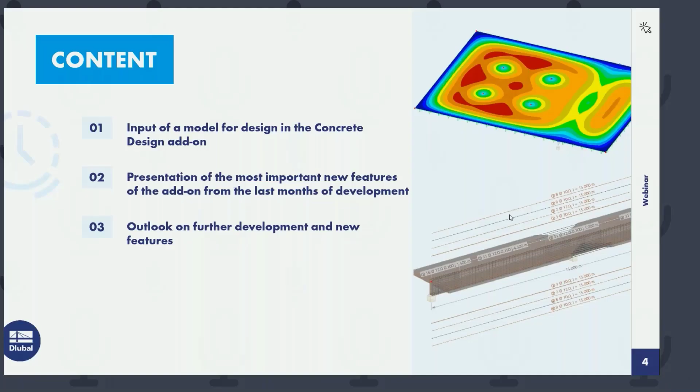Okay, thanks Andreas for the introduction. I will start with a short overview of the content of today's presentation. As I already mentioned, I will show you new features in our concrete design add-on. Therefore, I will create a small structure in RFEM 6, and during the modeling process, I will tell you about all the new features we now have in our concrete design add-on.

Just a short overview of these new features: mainly it's the automatic function for surface reinforcement. Then we have a new function regarding determination of required reinforcement for members, which now also includes the serviceability limit state design. Then I will show you how to design with member representatives. We also have a new multi-edit option in the edit member dialog for members and member sets. If we have entered reinforcement with a certain reinforcement layout inside our member, we now have a new function for printing graphics of this reinforcement template or proposal into the printout report. I will show this to you as well. And I will show you how to activate the design check for the shear joint in the add-on.

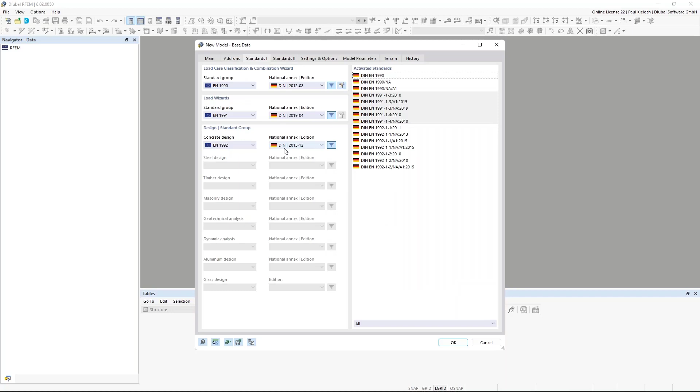Okay, with that, I would switch directly to RFEM 6. As I mentioned before, I will start with creating a new model. I'm opening a new model file, and what I would like to do today is start with a template. That has the benefit that some settings are already stored in the template, and add-ons can be activated, or I could predefine national annexes and so on. This is already set in this template, and I'll give it the name webinar, and maybe English, so that's the English one. And I start this file here.

As mentioned, due to the fact that I've used these templates, I have here a certain amount of materials, sections, thicknesses, and so on. I will use them today for this presentation.

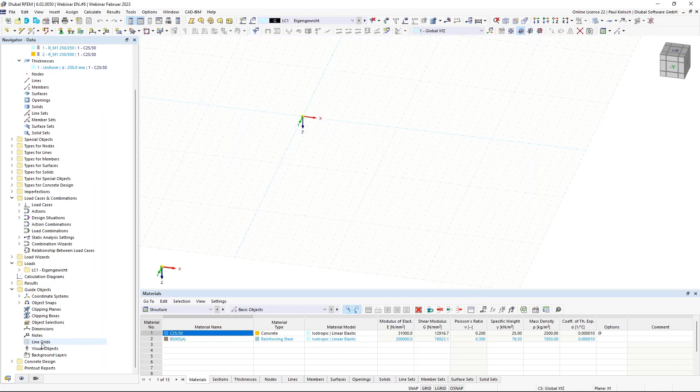So at first, I'm switching here to these guide objects, and there I will create a new line grid. I will use or show you today also the labels here and the dimensions.

Switch here over and enter the dimensions in X direction: 5 meters and 4 spans. So it looks like this.

And in Y direction, the first span with 5 meters. Then I have 2.5 meters and 2 spans. And the last one is again 5 meters. So this is my line grid, which I would like to use today.

It looks like this. And on this line grid, I will create my slab and my beams and columns and so on. So I can switch off the grid in the background, and then it's a little bit cleaner if you just see the line grids.

The first topic is entering a surface for design. So I'm creating here a concrete surface with the thickness of 250 millimeter and this concrete here.

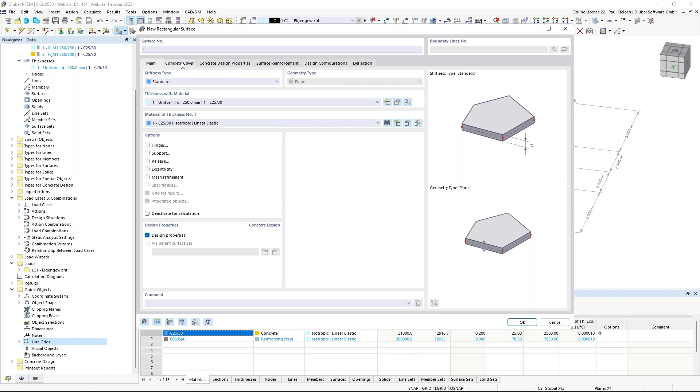And before entering this surface, I can directly set the design properties for this slab. So concrete cover and the concrete durability class, I leave it as it is by default here in this example, XC1.

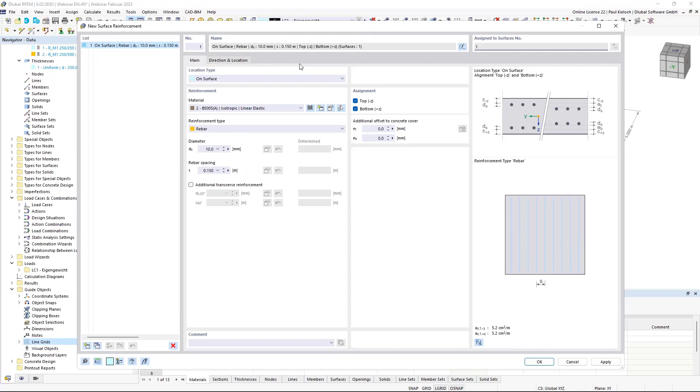The reinforcement direction is also default, and I will assign here a basic reinforcement for the whole slab with a diameter of 10 millimeter and a spacing of 15 centimeters in both directions.

You see here already some changes in this dialog, and I will come back to these changes and modifications in this latest version of RFEM 6 later after the first calculation. Okay, I can confirm this.

The design configurations, I leave them also by default for this first attempt here, and I will also come back later to these design configurations.

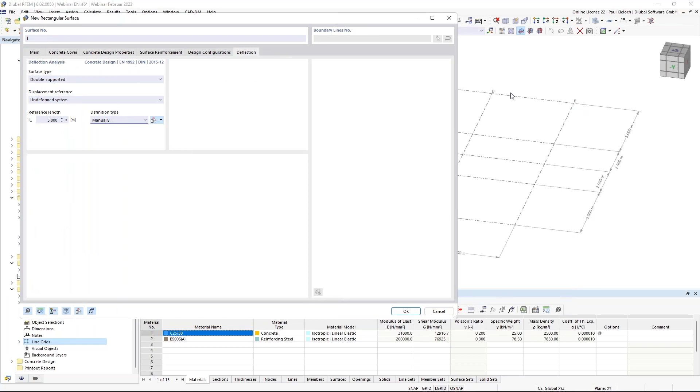Last thing I'm changing here is the reference length for the deflection analysis. So I switch this to manually, and the reference length is now set to 5 meters in X and Y direction.

Confirm this OK, and then I create here my slab. By default, you see here also the rendering of the assigned reinforcement mesh.

What's new now in RFEM in the latest version is here the description of the assigned reinforcement. In the previous versions, there was a small arrow downwards and upwards. If the arrow was downwards, it was the reinforcement on the bottom side, and if it was upwards, then it was the reinforcement on the top side of the slab.

That was changed a little bit, and it's now just a small line next to the text on the downside or on the upper side. So it's a small change here.

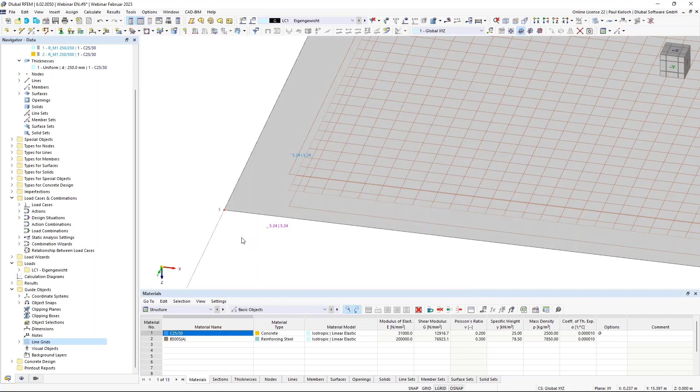What I would like to change is here the number of decimal places for this example. Now I'm switching off this reinforcement just to have a cleaner look on the structure.

The next topic is that I would like to enter a beam here, or a rib member, in this axis D. Therefore, I create a new member, switch the type here to rib, and I'm assigning this eccentric cross-section on the positive Z side of the surface.

That's a setting by default. The used section should be this 250 by 500 millimeter section. Can confirm that is okay.

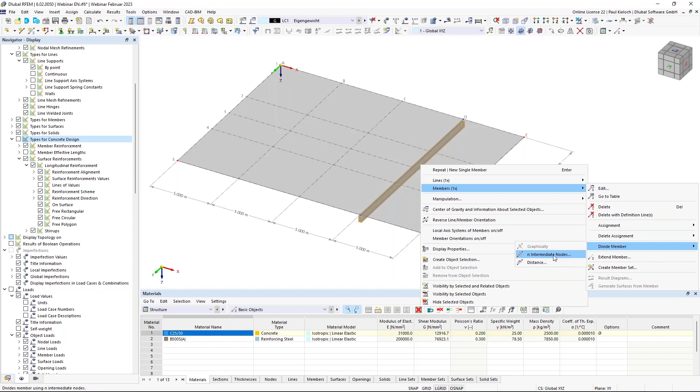And then I will assign this rib here in this axis. And here in axis 3, in this point in the middle of the beam, I would like to support this beam with a column, and therefore I'm dividing this member here by one internal node.

But what's new in RFEM 6 is that we can use this node type 'on member', which has the benefit that our member is not divided in two parts, making it a little bit easier for definition of reinforcement and so on. So I will create a new node just with the type on member, without dividing the member.

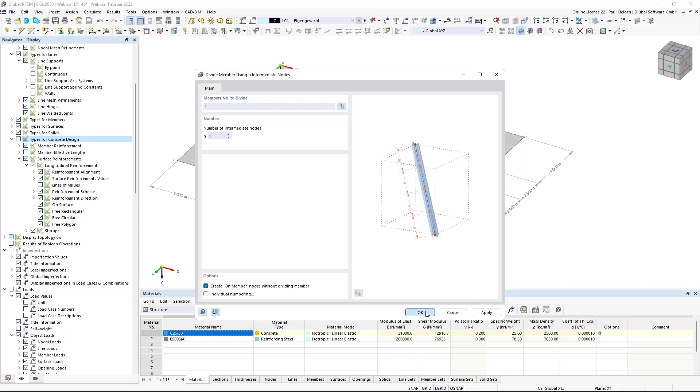You see this here in the middle of the beam with a light blue node, and that's the new type for dividing members.

The next steps I would like to do is entering here nodes for the column heads. So they are here in these points.

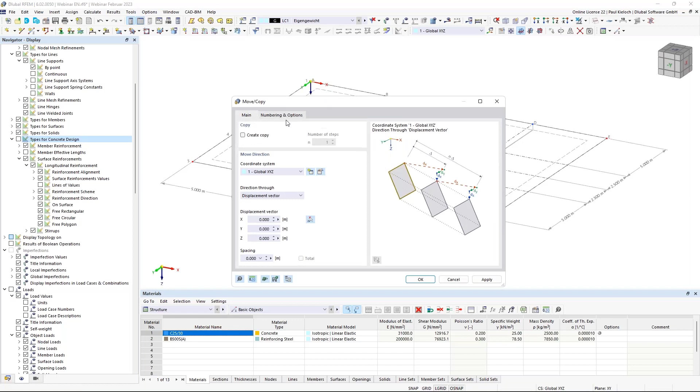Okay, and now I'm switching to the wireframe display model, and I can select these 5 nodes here, and then I will copy them with 3 meters in Z direction, and I can link these steps here and enter automatically a new member. Therefore, I will create a template.

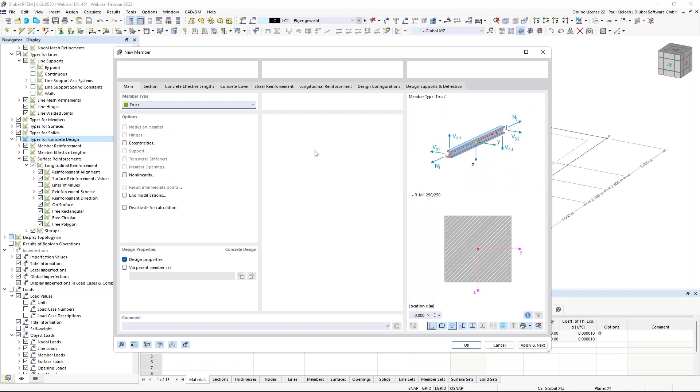The columns should be hinged at the top end and the bottom end. So I'm switching here the member type to truss. The section is pre-selected in this case, like I would like also to use it, with 250 by 250 millimeters.

And I can now go through all the settings, all these design properties here, and entering, for example, the buckling lengths for the stability analysis. And in my example, it's a braced system, and I would like to use these effective length factors of 1 in both directions.

Okay, next step would be the concrete covering. I leave it here in this example like it is. Regarding the shear force, I would like to use shear links with a thickness or diameter of 10 millimeter and a spacing of 15 centimeters. And the longitudinal reinforcement should be uniform surrounding, 4 rebars and a diameter of 20 millimeters.

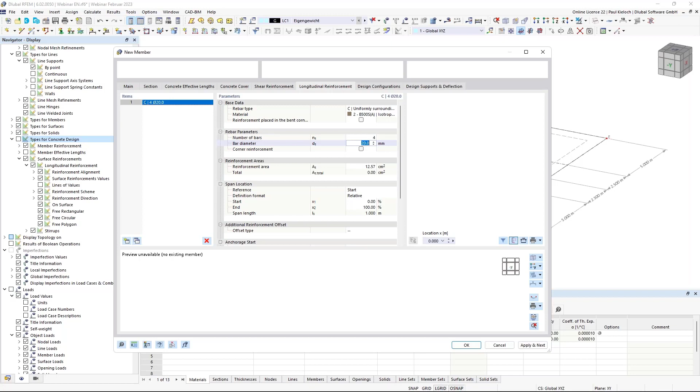Design configuration and design supports are not required to change here in this case, so I can confirm this. And then I'm using the template to create my columns, and they would look like this.

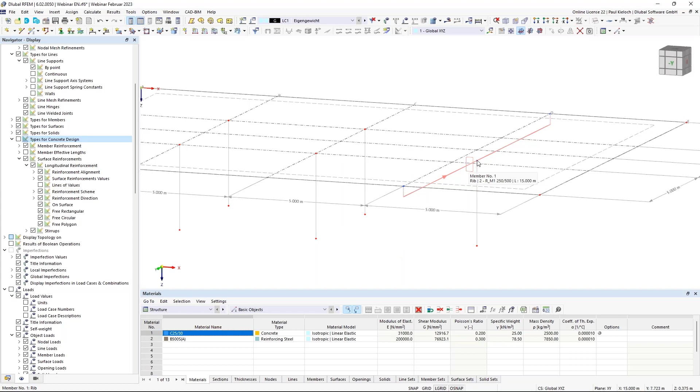I have just to take care because this node is here in the center of this eccentric beam, so the nodes at the bottom end are not in the same height. I will just do a double click here on this node and switch this to 3 meters, and then we have the same level here.

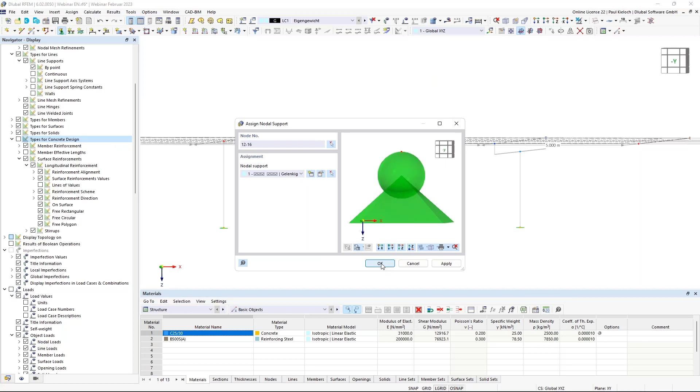Okay, then I can create the supports for these columns due to the fact that I have hinged member ends by this member type. I can create a new nodal support, and this is fixed or rigid in all directions. That would look like this in this example.

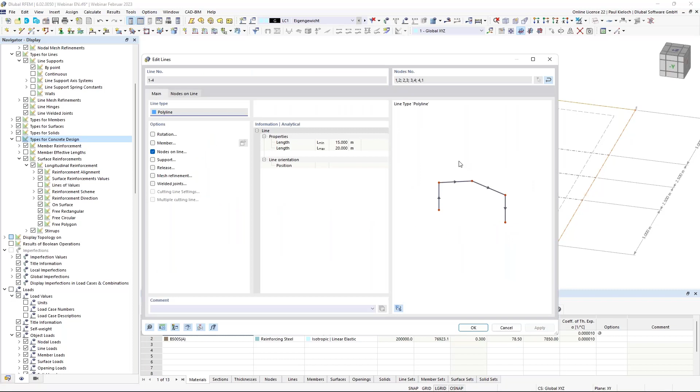Okay, then the next topic would be entering the support at the edge of the slab. So there I would like to consider walls. Therefore, we have also an option in RFEM 6, so I can select all the lines at the edge of the slab, opening them with a double click, and I will assign there a support, create a new one for them, and this one will be changed to local.

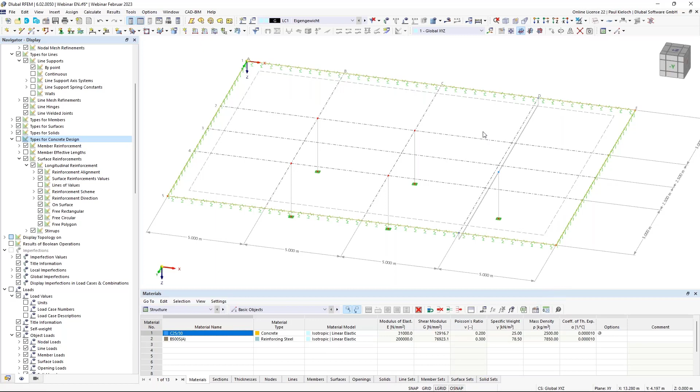And as soon as I switch this to local, I'm getting here a new option, stiffness via fictive wall. And the wall thickness should be 25 centimeters and a height of 3 meters. And it is hinged at the wall head and base. So that's okay for me. Can confirm this, and then I have also the lines on the edge of the slab supported.

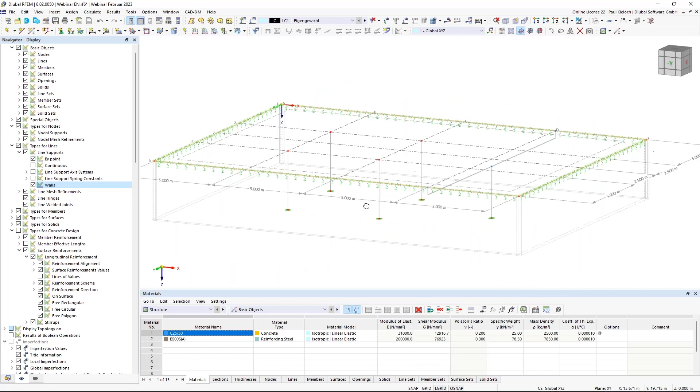If I would like to check this graphically in my system, then I can switch to the view or display navigator. And there under the line supports, I have the option to activate the walls, and then I would see the system also with these fictive walls here. That is basically my system now.

What I have not defined yet is the settings regarding the RIB. Therefore, I'm opening the RIB member once again, and I switch to this tab here with the RIB. And in this table, you can basically assign the segment length for the determination of the effective width for the ribs. I will not go too much into detail for this part.

We have shown this in our first webinar regarding concrete design in November 2021, and it's also part of the Eurocode 2 training where we get more into detail regarding this table. I will just enter the values here to have a realistic effective width for this example.

I'm using here this approach according to Eurocode 2, so I'm setting the segments here, user defined. It's the same on the other side. Basically, I have to do this because I'm using one member which is supported in the middle, and therefore the program needs the reference length.

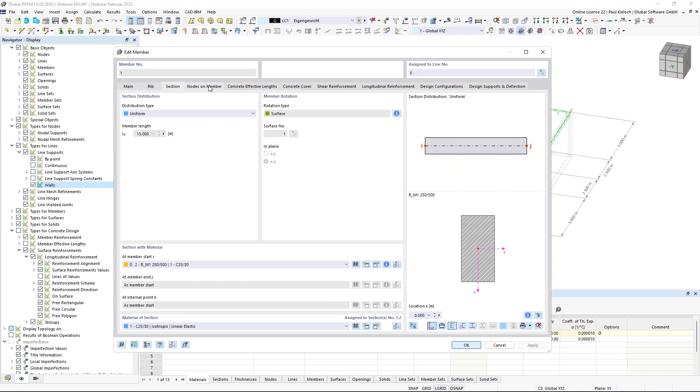So next is the section tab. There I do not have to do any changes, this is okay so far. Concrete covering also, so I can directly switch to the shear reinforcement.

I would like to use here shear links, stirrups with a diameter of 10 millimeter and a spacing of 0.15 meters. And I will not use this for the whole length of the member, but I would like to have a span in the middle of the beam where I have 10 centimeter spacing between the stirrups. So therefore I'm creating new spans.

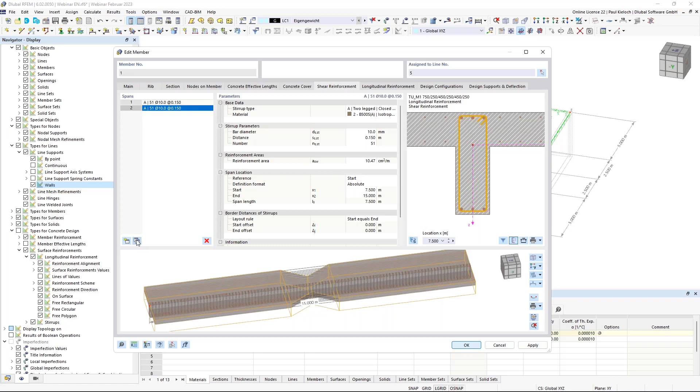First switch here to absolute for the definition of the span length. Then I just click 2 times on this button, and then I'm getting here these spans. If I zoom in a little bit, then you see that here this middle span is now a little bit displaced and not in the middle of the member.

And I can change this here to 6 meters, and in the second X location to 9 meters in my example. And then the span is in the middle of the beam. And I can change this to 0.1 meters or 10 centimeter spacing. Okay, that's my shear reinforcement I would like to use today.

And then I'm switching to the longitudinal reinforcement. By default, the reinforcement is using here 3 rebars at the top side and on the bottom side. I will change it to 4 rebars.

And then you find also here the rebars from the surface reinforcement, which is automatically also assigned to the flanges of the rib member. If you do not want to assign this surface reinforcement here, then you can switch it off via this button, but I will leave it on here for this example.

Last thing I would like to add here is additional reinforcement on the sides of the web. So therefore I'm creating a new item, and this one is a uniform surrounding for my example here.

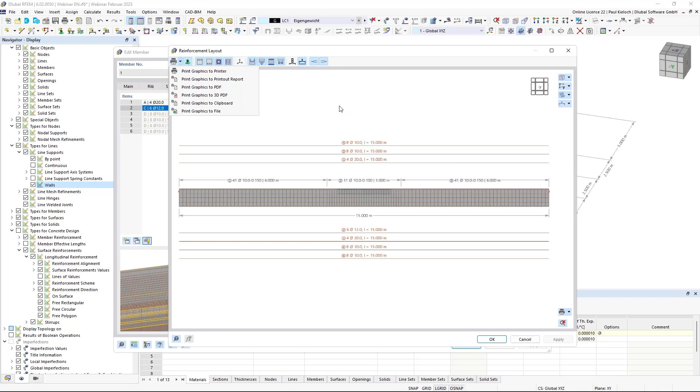Now, if you have entered the shear reinforcement or the longitudinal reinforcement like this, and you would like to print a graphic of this definition into the printout report, there is also a new feature. You can click on this button here, and then you get a new dialog called reinforcement layout. And in this dialog we have a new function, and there you can print the graphic directly into, for example, a printout report or 3D PDF or a graphic as a file. So it's not a CAD file, it's a picture file. So you have this option, basically the same like for printing a regular graphic into the printout report. So that's also a new feature in the add-on.

Okay, then I'm switching to the tab with the design configurations. There we have the ultimate configuration and the serviceability configuration. And in both configurations, we have now 2 new features, or in every configuration, we have 1 new feature.

If I'm switching to the ultimate configuration, then you can see here this shear joint, and that is what I have activated before in this tab with the rib. So in general, there is always the shear joint design check activated, and there you find further settings, for example, how the program determines the shear stress in the joint, or you can also activate here design of flange connection on segmented cross section.

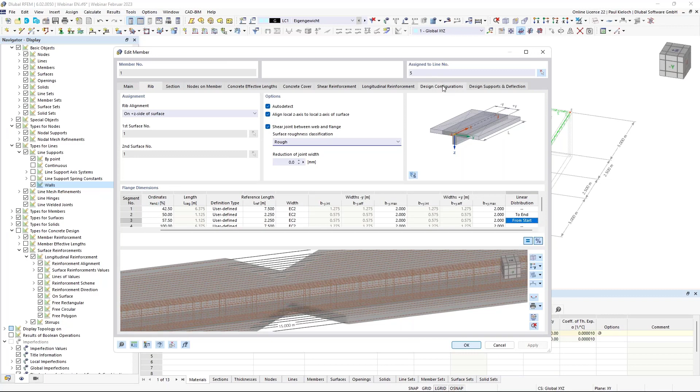So if you would like to perform these design checks, then you can check it on here in this ultimate configuration. So just keep in mind, this is always active, but you also have to take care whether you have activated the shear joint in the individual members. The next new feature is inside the serviceability configuration. So for the members, you find here a new option: determination of longitudinal reinforcement for members.

We have implemented this at the end of last year, and now it's possible, if you check this option on, to consider also the parts from serviceability limit state in the result diagrams for the required reinforcement. So in the older versions of RFEM 6, there was just the ultimate limit state considered in the diagrams for the required reinforcement. And by activating these options, the diagram will also consider the parts from the serviceability limit state.

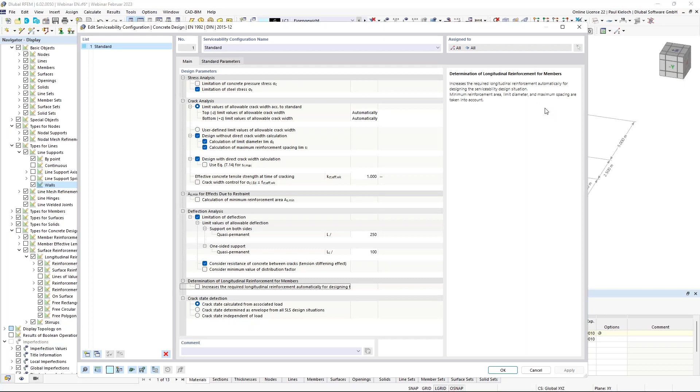If you click on this here, then you get a little tooltip. And there you see that currently this option considers the requirement for the minimum longitudinal reinforcement, the design check for the limit diameter, or the maximum spacing. So the direct crack width calculation is currently not implemented. Okay. That's so far regarding the new features in the configurations.

One last topic I have to enter here is the design supports. In concrete design, we are checking the deflection in Z direction. So I'm switching here to the local Z axis. And if I zoom out a little bit, then you see that the member length is 15 meters. So this dialog basically does not know that we have a column in the middle of the member. So the reference length would be by default the total member length, and for the deflection analysis that would not be okay in this case. So I have to enter design supports to consider this correctly.

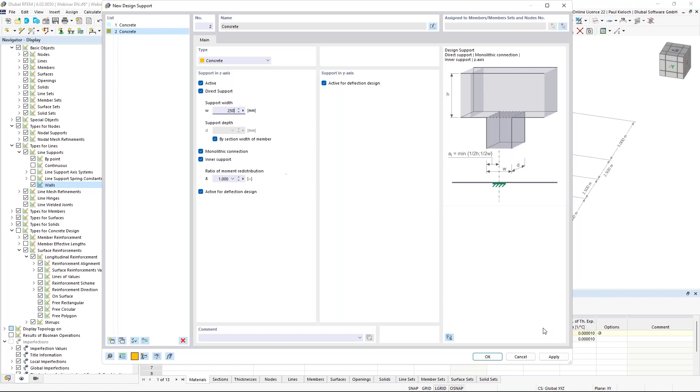I'm creating a new one, monolithical, with a width of 250 millimeters in my example. That will be assigned at the start and the end of the beam. And then we have also one here in the middle. That is an inner support, also 250. And as soon as I have assigned these design supports to this internal node, you see that we have two spans, each with 7.5 meters. Okay.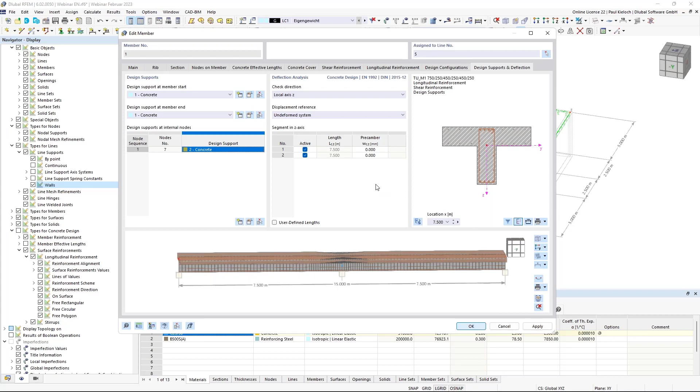We have defined our reinforcement for the member. And the next topic I would like to enter here with the structure is an FE mesh refinement. I would like to assign the FE mesh refinement on these nodes. So I'm selecting them, double click FE mesh refinement, and I create a new one that should be rectangle in my case, and I'm using an inner length of 7.5 centimeters.

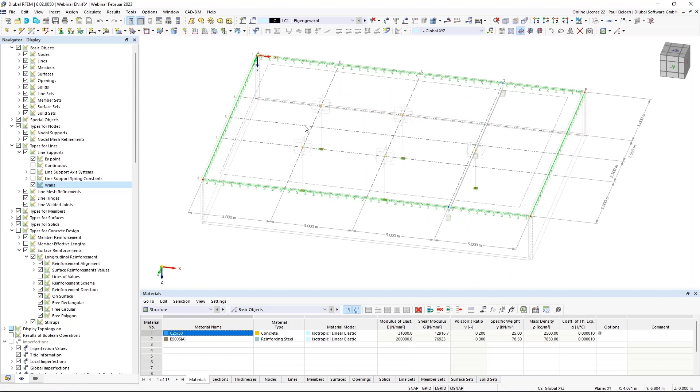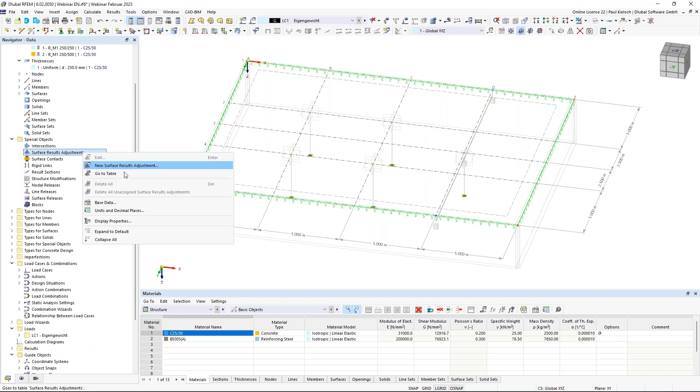Okay, so it looks like this, and now, if I have assigned a mesh refinement, I can also use in this situation a surface result adjustment to use average values of the surface internal forces. Therefore, I'm going to the special objects, and there you find the surface result adjustments. So I create a new one for surface 1. I will use dimensions in A and B direction with 0.75 meters, both directions.

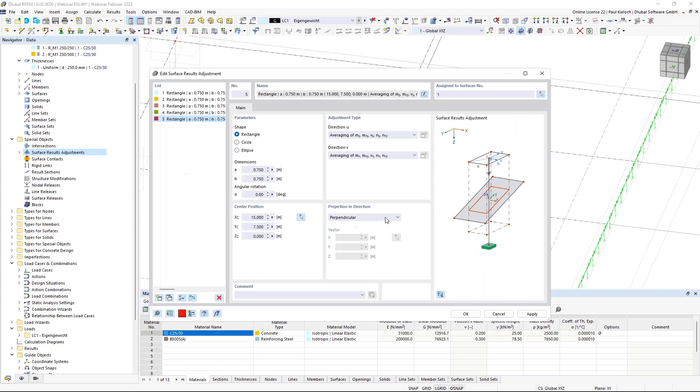And with this button, I can set the first location. And then if I click on apply, I can show you where this is located now. I'm using this button for copying this assigned surface result adjustment. And then it's pretty easy to create them, just clicking on copy and switching the location. It goes like this. Here. Okay. And if I click on apply, then you see them here in my file.

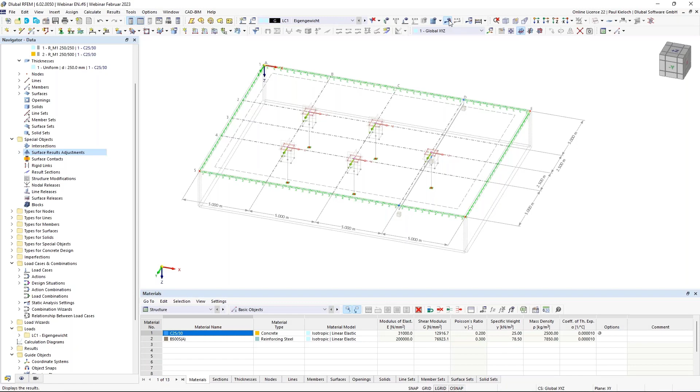The next step would be to enter the loading. Before I'm doing this, I just want to check whether my structure is correctly entered, whether there are maybe some problems regarding the mesh and so on. Therefore, I would just calculate the first load case. And yeah, that looks okay. Everything seems to be connected properly. And now I can show you also, if I switch to the internal forces of the surfaces, how the surface result adjustments are working. So everything seems to work.

And now I can switch off the results and the FE mesh, and I can also switch off the surface result adjustments, the result objects. And I'm also switching off the nodal mesh refinements, and then I have a cleaner look on the file. Okay. Now I can start with entering the load. At first, I need some new load cases for this situation. So my first load case will be the load case for the self-weight. I will call it just DL for dead load.

And then I will create a new one here, live load 1. And I'm using this category. And I'm copying this. And then this one is live load 2. This one is live load 3. And this one is 4. Okay. Apply.

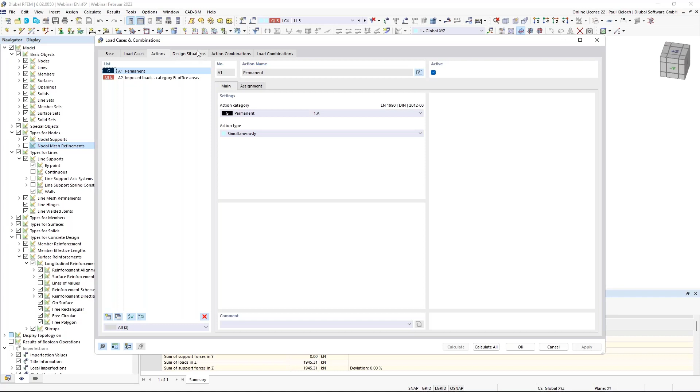The actions are okay in this example. I'm switching to the design situations. The design situation serviceability limit state frequent is not required here in my example, so I can delete this one, and I will do the design checks just with the characteristic and the quasi-permanent design situations.

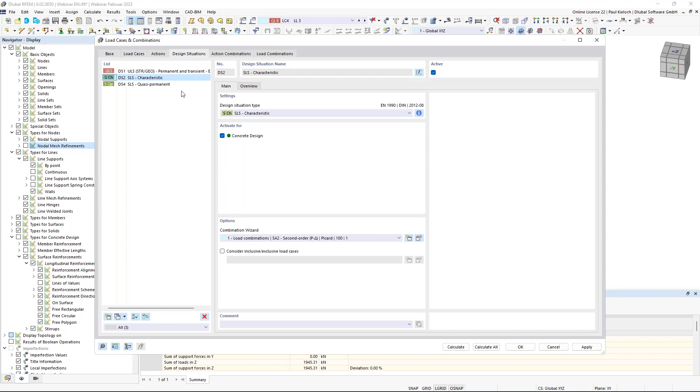One change is that I will create load combinations according to first order analysis. So I'm switching that here and switching to the action combinations. And then if I click on this tab, I will get the load combinations, and they are all according to first order analysis. Okay, those are my load combinations for this example.

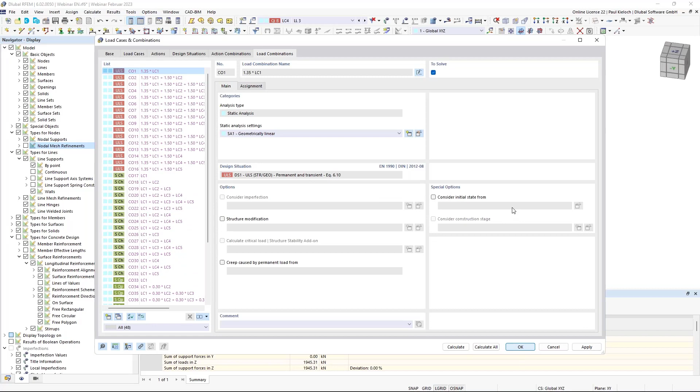And now I can start filling these load cases with loads. So the first load case, dead load, will have 1.5 kilonewton per square meter on surface number 1, and it looks like this.

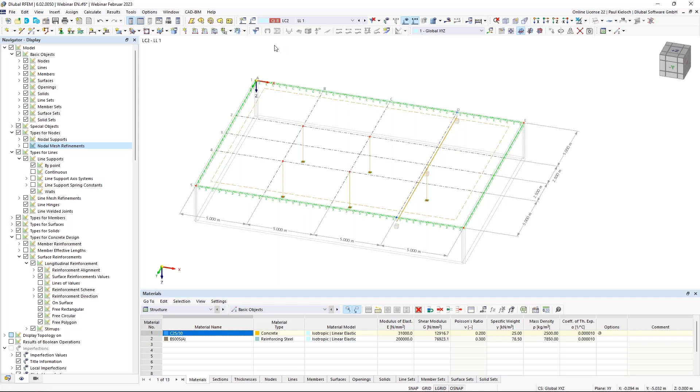Here in the second load case, it's now a little bit more problematic. For the live load, I would like to use a loading pattern according to this grid, to these fields here. Currently, we do not have a load wizard for this, so I will create the loading pattern by using surface loads, rectangular loads, and polygon loads. So I'm in my load case 2, and I will create a rectangular load on surface number 1.

The load value here in my example is 3.8 kilonewton per square meter, and the location is from that point to that point. And I can click on apply next, and then I see the load in this field. And now I'm just entering the surface and switching the location once again. Looks like this. Apply next. 1 and here on this point.

And okay. So in this situation here and in this situation, it's a little bit more complicated, so I cannot use the rectangular one. I will use the polygon load here. It's also assigned to surface number 1. And then from this point to that one, and that one, confirm with OK. The load value is also 3.8.

OK, and then I need this function once again. And now from here to these nodes, OK. And it looks like this. So now I switch to the next load case. And I'm starting once again with the rectangle. 3.8. Here. Apply next. Here. Apply next.

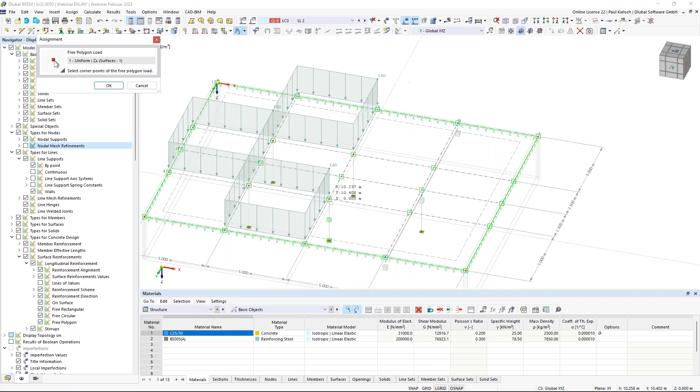Here and OK. And then I'm switching to the polygon load here, from that point to that and that point. OK. 3.8. OK.

For live load 3, I'm using the rectangle again. Surface number 1, 3.8 kilonewton per square meter. And it's from here to here. And then I can click here, apply next. And then I can switch the load case in this dialog, assign it to surface number 1 again, and switch the nodes. And then it would look like this.

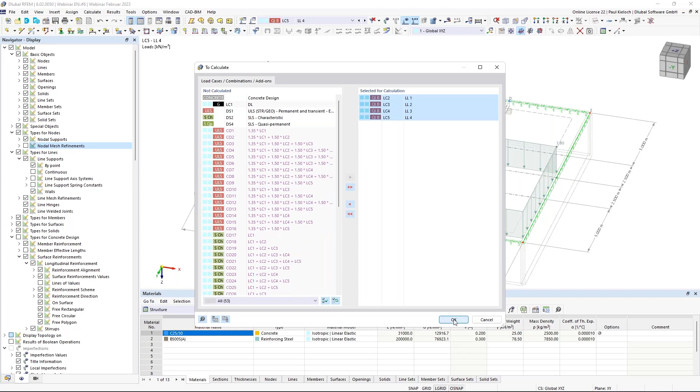If I'm entering these loads like this, then I'm always starting a short calculation. I'm going to calculate and just selecting the load cases where I have assigned the loads. Start the calculation. And now what I'm always doing is switching on the load distribution here in RFEM. I'm switching off the load itself, but just the 2D elements.

So now I can switch to all load cases and just check whether the loads were applied correctly. So I have here my 3.8 kilonewton per square meter, so I can directly control the loading pattern here. Okay, that looks okay so far. So we have entered our combinations and also our loading.

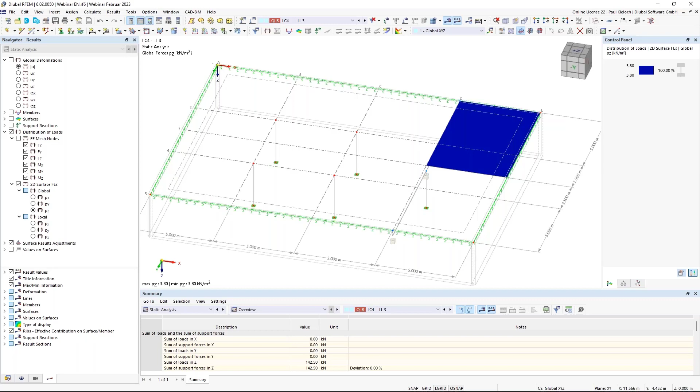And now I can basically start with the first calculation in the Concrete Design add-on. Therefore, I'm switching here in the table to the add-on Concrete Design. By default, all objects are activated here, but I will do the first attempt just for surface number 1. And then I'm starting the calculation.

It takes a moment, and then the program will show us the design checks for surface number 1, and we can check the design ratios at first for the ultimate limit state. And then we can check where we have to enter additional reinforcement.

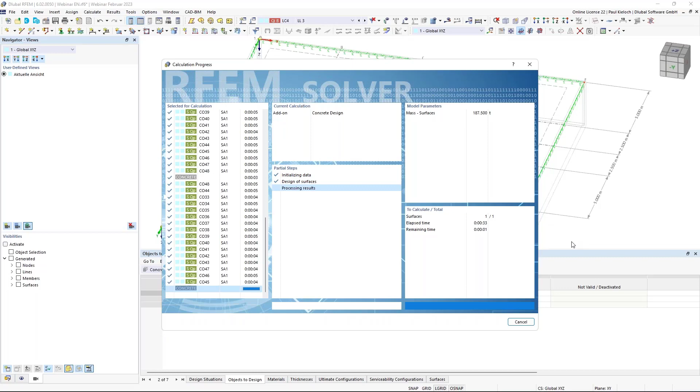Okay, so basically if you do surface design, this dialog will in most cases look like this or similar. So you have several points where it's not designable, or you have not designable nodes. Therefore, I would switch over here to this design checks on surfaces. And in my case, I would like to check it, for example, for the top side in direction 1.

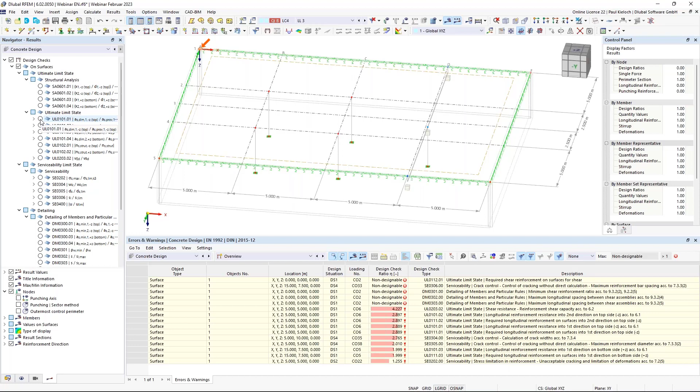And then it looks like this, that especially over the columns, I have elements where my design checks are not fulfilled. So here you see it, it's a range from 1 to almost 3 times not fulfilled design checks. That's the same also in the other direction. And on the bottom side, it looks a little bit better, but yeah, there's also a small problem here in this area. So if I have this result diagram in this way, then I can also switch to the reinforcement.

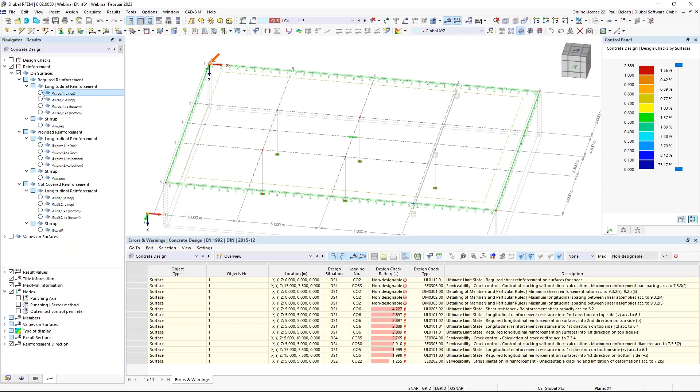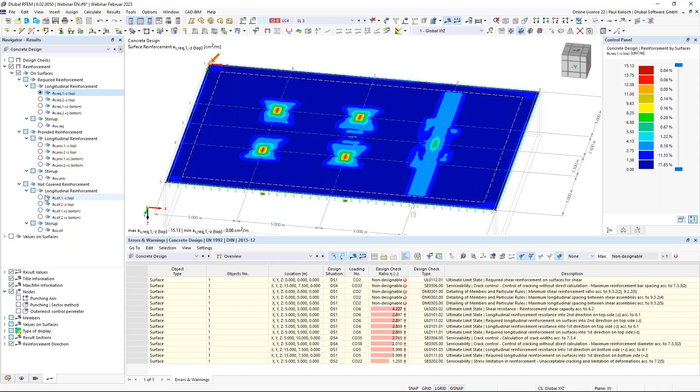So on the reinforcement, I can switch on the required longitudinal reinforcement on the top side. And then I see these values here. And one more informative graphic would maybe be switching over to not covered reinforcement. So we have assigned here a basic reinforcement of 5.24 square centimeters per meter, and now it would be interesting where I have to assign additional reinforcement, and therefore I'm switching over to this not covered reinforcement.

And that is, like I said before, basically over the columns, and here in the middle of the beam there's also one area where I would need additional reinforcement. Now if I'm entering additional reinforcements, there we have a new feature, and therefore I'm switching here in the data navigator to the types for concrete design, surface reinforcement, and I create a new surface reinforcement. This new surface reinforcement will be also assigned to surface number 1, but now not on the total surface, but it will be changed here in my case to a free rectangular location type.

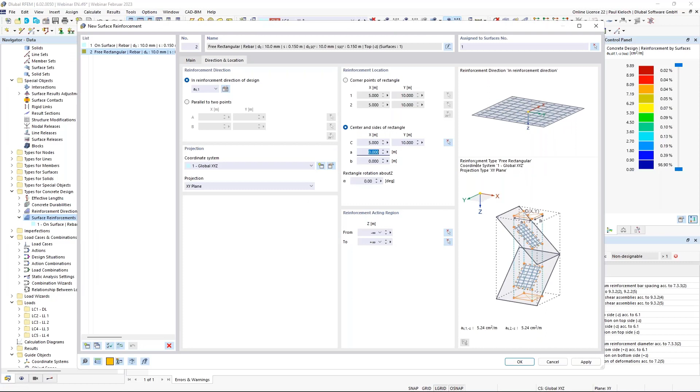The first additional reinforcement, I will assign them just on the top side, and I will enter here an additional offset of 20 millimeters. And I will use this additional reinforcement in both directions. And the location will be here, for example, on this point. And the dimensions are 2 by 2 meters. And just clicking here on apply. No, not yet. So, we'll enter it once again. Millimeters, okay. On this point, and 2 by 2 meters, okay.

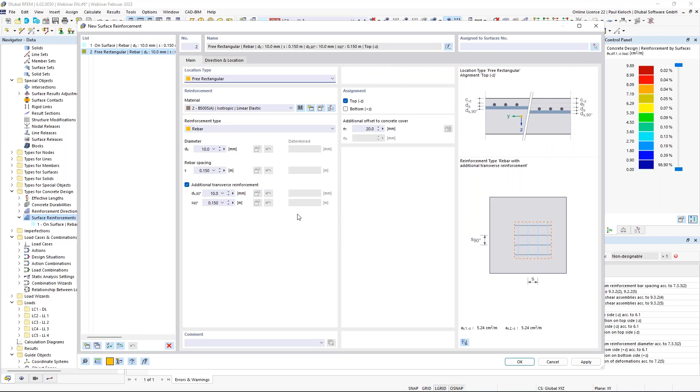So as I said before, there is now a new option here regarding determined and buttons to overtake a determined value. And these buttons are required for a new function in RFEM 6. And you can find this new function if you click here on this button. Once in the diameter, it's called auto, and also in the spacing. So what you can do here now is you can assign an additional reinforcement, which is covering automatically the not covered reinforcement from the first calculation.

So in my case, I'm needing here an additional reinforcement of around about 10 square centimeters per meter. And I can say that I would like to use rebars in both directions with 12 millimeters. And the spacing between the rebars should be determined automatically. So if I'm selecting auto, then the program shows me these additional parameters, and there's the minimum spacing and the maximum spacing defined here. So I will use 10 centimeters as minimum and 30 as maximum, and confirming this with OK. It's the same in this other direction. OK, I click on apply.

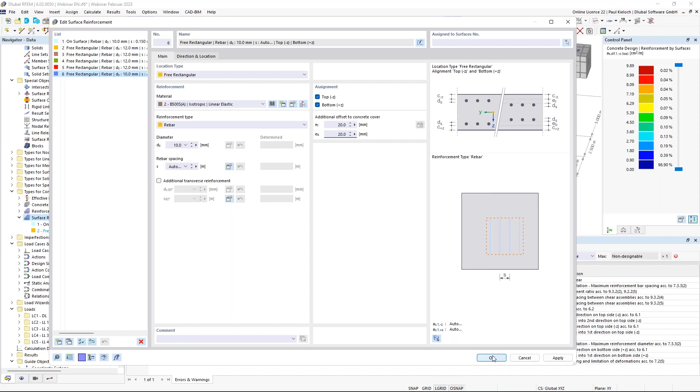So the next is that I'm copying this one here. Copy, and I just change the location. So that is basically the same like I have done it before with the surface results adjustments. This one, and OK. And the last one will be here. Okay, and the last one is just in direction 1. I will use 10 millimeters here, but this time on the top and bottom side, this way. Also auto, OK. I can click on OK. And it looks like this.

So now I just go to concrete design. Okay, so results, just delete the results here. And now, due to the definition of this additional reinforcement here, I've just forgotten to assign this to surface number 1. That was the problem. Okay, now it's assigned.

And if I switch the display setting on, then you see here on these slabs this additional reinforcement. It looks like this. And due to the fact that we now in this state do not know which value is assigned, we have just the info that it's auto reinforcement. So with these settings, I can start the calculation once again.

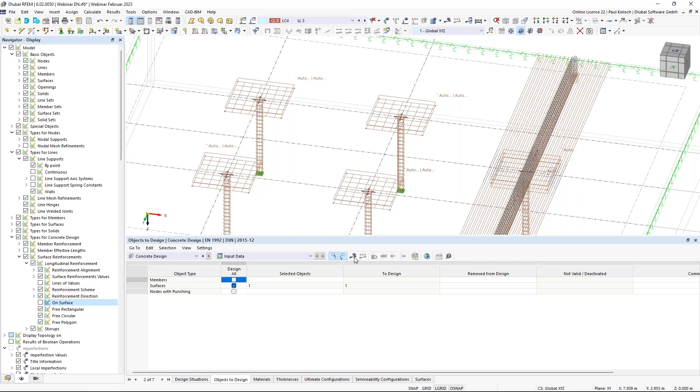And now the program will cover all the not covered reinforcement automatically, and the result will be that I'm getting an info about the spacing I have to use if I assign, for example, a diameter of 12 millimeter or 10 millimeter and so on.

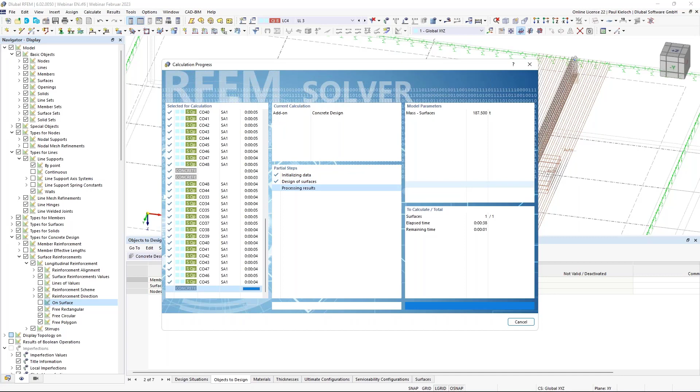Maybe one point which I have not mentioned yet is that you cannot assign the auto function in diameter and spacing at the same time, so that is not possible. You have to use either the automatic function for the diameter or the spacing. Okay, just wait a moment. And now it looks like this.

So what you see now here is we are still in the results with the not covered reinforcement. So you see now here that the not covered reinforcement is now 0 here. If I'm switching over here, one small part, it's 0.7 square centimeters, so I will neglect it here for this part. But on the other sides, everything is also covered.

And now you see here the info with the required or assigned additional reinforcement, so the value in square centimeters per meter. And if you would like to see the spacing, then you have one option. You can go to the reinforcement on surfaces and to the tab here in the table surface reinforcement. And if you click on one item, then this line or this item here also in the table will be highlighted.

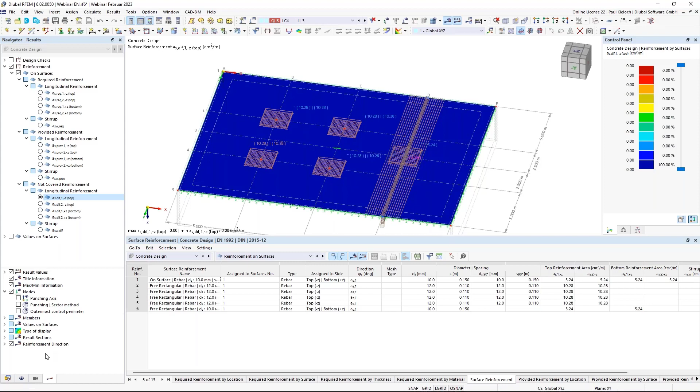And in this case, I see that I have to assign at least additional reinforcement of 12 millimeter and a spacing of 11. So maybe you think that spacing of 11 centimeters is not so practical, so you can also use other values. So if I'm opening the dialog for edit reinforcement once again, you have now two options basically. One would be that before you start the auto process, you can switch the increment in this additional parameter settings so that you, for example, use just 5 centimeters. That would be an option.

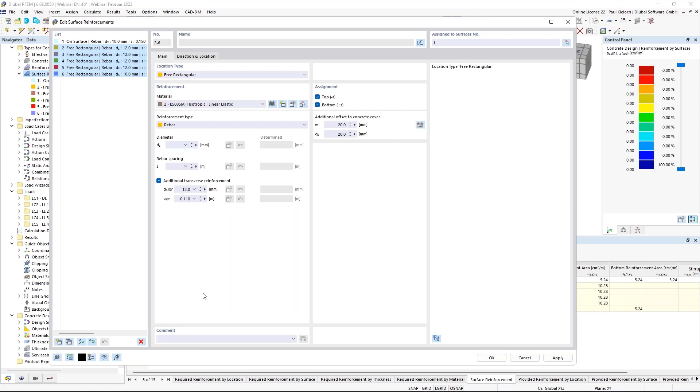But you can also use now this determined value here and overtake this here in this cell, and then you can edit it. So I could overtake this value and modify it, for example, to 10 centimeters. That's one option using this button here. It's also possible to select all items here which have this auto setting. And then you can use the same button here at the bottom end, and then the program uses the automatically determined values here. Okay.

I can assign this one, and I will delete the values just for concrete design. And before I'm starting the next calculation process, I will continue with the columns. With the columns, I will show you two new features. One would be regarding the multi-edit. So in case you have a member with a different type of reinforcement layout.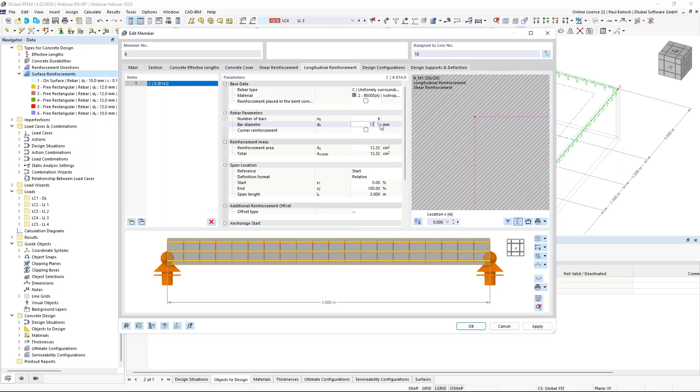So let's say, for example, in this member, I would assign 8 rebars with a diameter of 12 millimeter. It would look like this. So here we have our 4 rebars with 14, and here 8 with 12 millimeters. In the previous versions, we had the limitation that if you had different reinforcement proposals, then it was not possible to do changes in the shear reinforcement and longitudinal reinforcement. And that little downside is also solved now, because now it's also possible to show members with different settings.

So you see, for example, that we have here the same rebar type, uniform surrounding, but here we have different number of bars, so from 4 to 8, and also different spacing. And here in this dialog, there is basically a certain member of the selection displayed. So if you would like to see another member, then you can switch here with this option between the members, and then you would see the rendering for the selected member here.

What I can now do here with this new function is that I can put several different members into one selection and change the reinforcement for all these members in one step. So I would set it back to 4 rebars with 14 millimeters, and then it's the same for both, and I will also get the name or the description of the item back, because the amount of rebars and the diameter is clear. Okay.

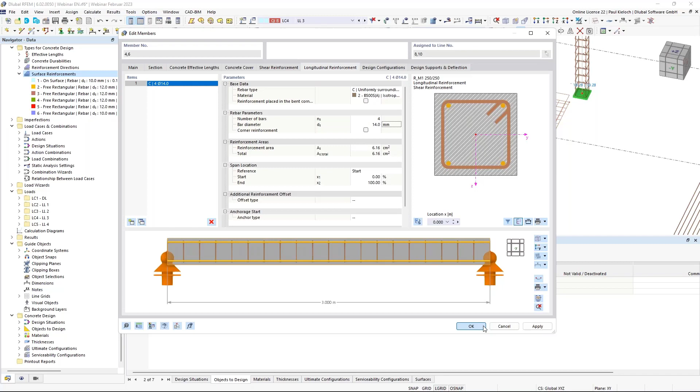That's basically regarding the multi-edit. So you have this multi-edit for the shear reinforcement and also for the longitudinal reinforcement. In my case, it's also the same length, but it's also possible to use this multi-edit if the lengths of the members differ. So the next feature I would like to show you is using member representatives for the design in the concrete design add-on. Therefore, I will create types of columns.

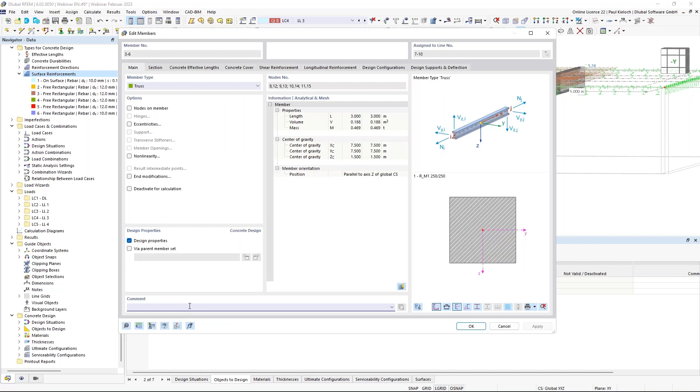So let's say you have a lot of columns in your structure and you would do the calculation with different types. Then you can, for example, enter here a comment. Let's say in my case, column type 1, this one. And the other 4, I would add a comment and say type 2, for example.

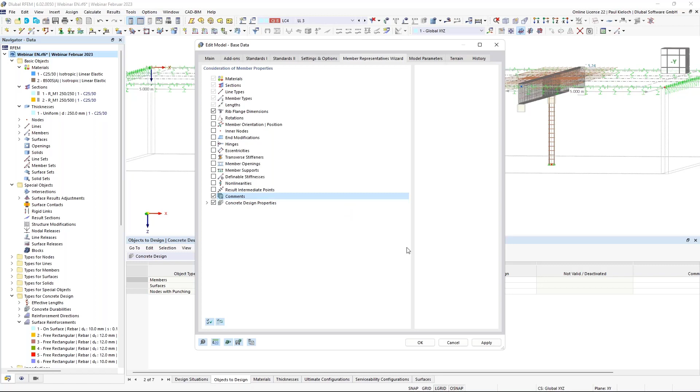So the next step would be to activate the member representatives in the base data dialog here. If you switch on or activate this member representative wizard, you have the option to also consider these comments. So I'm activating these comments here, and if I click OK, I get these member representatives.

So we have one member representative with blue bubbles and one with green. I can do a double click on it, and directly switch the name to type 1 column, apply, and this one to type 2. It's not required to change it, but it helps afterwards in documentation, since you can create printout reports and tables including the name, making it easier to document results for individual types.

Okay, so what you now see is that when working with these member representatives, you can also assign shear reinforcement, longitudinal reinforcement, and in general set all the design properties by using the member representatives.

Okay, I'm confirming this with OK. Now you see here in the table with the input data, these member representatives. In my example, I would like to do the design just for the type 2 and type 1 column. I will do the design for this member.

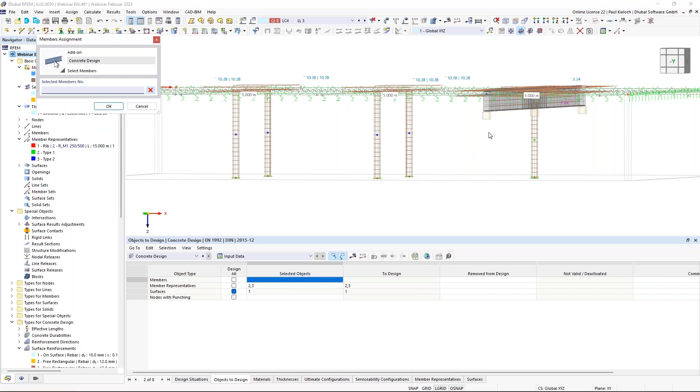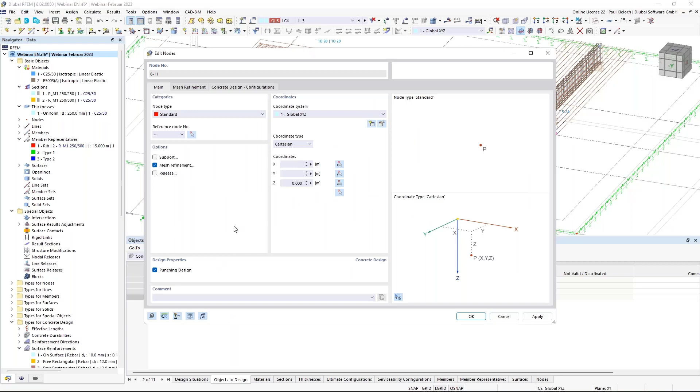OK, and then I will activate all my punching points here in the table, but I have to activate them also here in the structure. So this one, and this one. It's four nodes, and I will activate here the punching design check, and in the configuration for punching...

I'm switching this option to use the provided longitudinal reinforcement. As I said before, I used this auto function to create this additional reinforcement, and I will now also use this provided additional longitudinal reinforcement for the determination of the punching shear capacity.

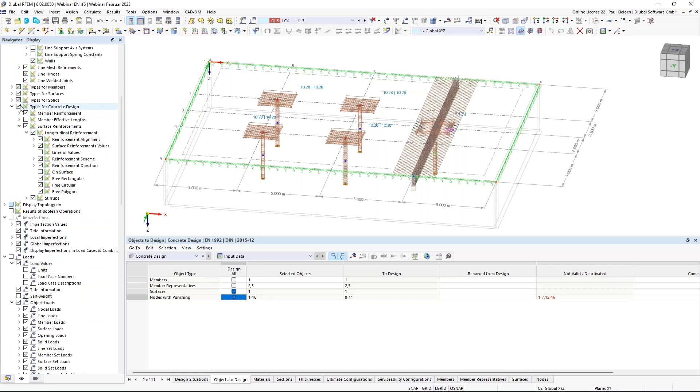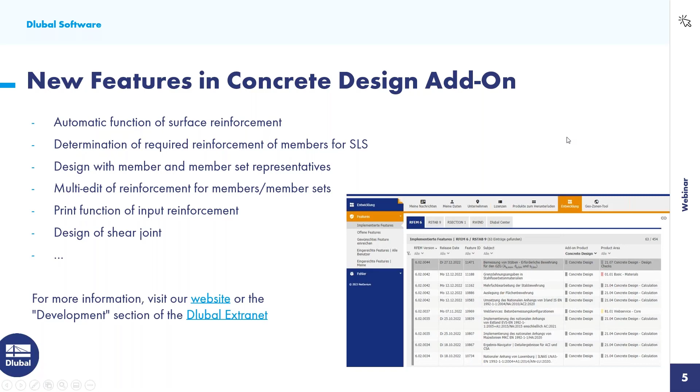That's basically all. I can now just save this file, and then we can start the calculation for the whole structure, but I will switch off the types for concrete design, and then start the calculation process. In the meantime, I'll switch over to the presentation.

So while the program calculates, I'll give you a brief overview of upcoming new features in our add-on for concrete design in RFEM 6. This is a random list, so it doesn't mean the first mentioned feature will be released first. The same determination of required reinforcement shown for members, using the option in the SLS configuration, is also being developed for surfaces.

Nonlinear calculation is also in development for ultimate limit state and serviceability limit state for slabs, members, and beams. Another upcoming feature is merging the shear and punching shear resistance and reinforcement design checks into one graphic.

Then, of course, fire resistance design checks, and seismic design of concrete components according to Eurocode 8. We are also developing an interface between RSECTION and RFEM 6.

This will allow reinforcing general massive cross-sections in RSECTION, not just in terms of longitudinal reinforcement but also regarding stirrups. So you'll be able to create free-form stirrups in RSECTION, then import this cross-section into RFEM 6 and do the design check there.

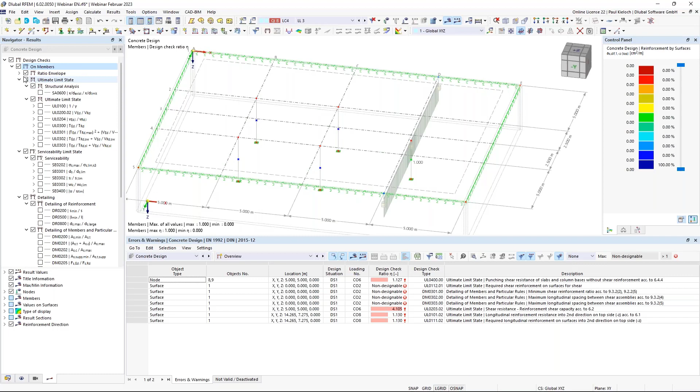I'll switch back to RFEM now, and we can do a quick overview of the results, because there we also have some new features. Just one for the members - I've done here the design on the member.

Just for this rib, I've used one member here, this rib member. For example, switching over here and showing the design check for the shear force, since some version we've extended the amount of intermediate results, so it's a bit more detailed now than in previous versions. You just click on this small arrow to get more detailed results. Here you see the results for the new features regarding the shear joint, listed in the design checks for the members.

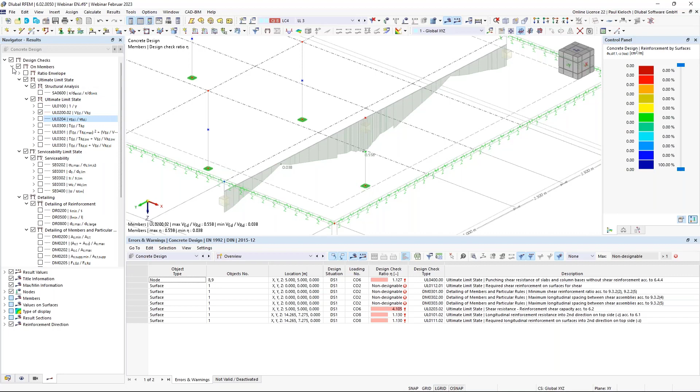Switching over to the member representatives, that's basically the same, but what I'd like to show you is if you do the design in the add-on with the member representatives, you get the same result for the individual member representative. So I have 4 columns, and the 4 columns have the same results. If you want individual results for the individual columns, you can use the representative for input, but you have to design the individual members, not the member representatives.

Regarding the surfaces, we checked the results before. I'd like to show you one last new feature regarding the punching, because in the latest version we've now also implemented this load increasing factor beta, which is now also possible to activate here in this detailed result. So under the design checks on nodes, you find this load increasing factor beta.

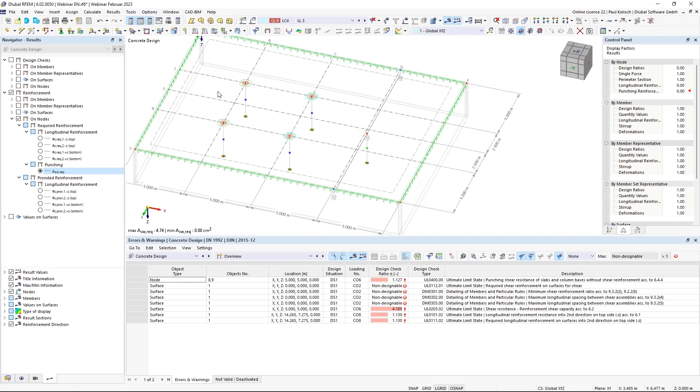Switching over to the reinforcement, then to the reinforcement on nodes. If you've activated the required punching reinforcement here, you can click on isolines, and by activating values on surfaces, you get the individual amount of required punching reinforcement in the individual perimeters.

And now, the last feature I'd like to show you: in the nodes, you have the option to also display the outermost control perimeter. That's also connected to the feature I mentioned before in the presentation, that we plan to combine the results of the design check for shear force in the slab with punching shear above these columns.

Okay, those are basically the mentioned new features in RFEM 6 and its add-on concrete design. And with that, I'll hand over the screen back to Andreas.

Okay Paul, thank you for this nice presentation and good overview of the current state for the concrete design in our program, and the outlook for the future. We promise to develop our programs continuously in the future. You'll see it in the next webinar, approximately in half a year. It's already planned.